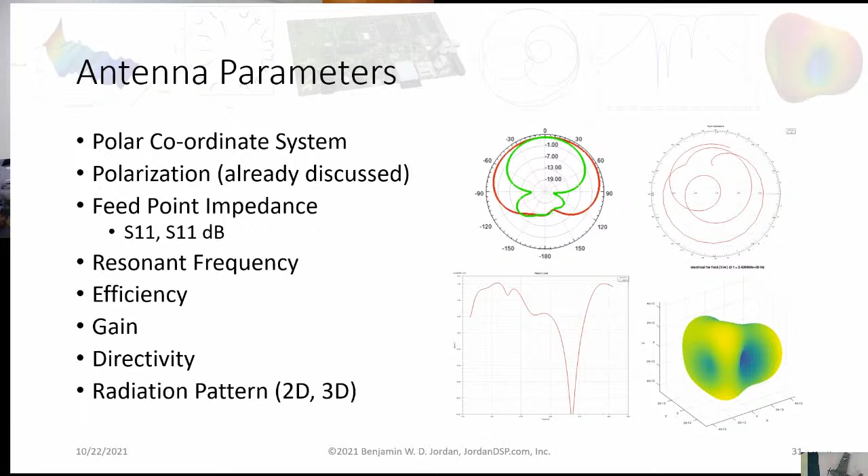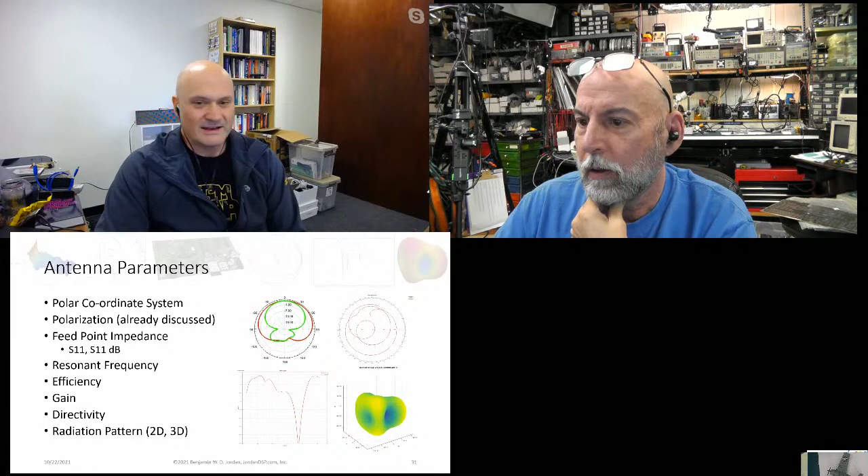OpenEMS is an open source finite difference time domain field solver. And so what does that mean? It uses the FDTD technique, which was invented by a brilliant postgraduate engineer called Yee. I think the technique was first published in the late 60s or early 70s, when it had to be done on mainframes. But now you can just do it anywhere, and it's probably the most common numerical modeling technique for electromagnetics. There it is. And you've got a picture there of the Yee cell.

The Yee cell is kind of the crux of it. It's what makes it an efficient, computationally easy thing: you divide the entire three-dimensional, or you could do it in two dimensions, model into these voxels. A voxel is a three-dimensional pixel. A voxel is a cube.

Right. And in the center of each surface in the Yee cell, say the three planes of the voxel, is your H field, and offset from those, in three of the corners of the voxel, are your E field locations, and that works naturally because the E field and H field are always perpendicular to each other. So I'm not doing it justice, and that's a very hand-wavy way of putting it, but there's other videos on YouTube that describe FDTD really well.

But OpenEMS is an FDTD solver written by, I think it's really just one guy, Thorsten Liebig. I hope I said that right. He's German, from one of the universities in Germany. And it runs under MATLAB as a plugin, or GNU Octave if you don't have a MATLAB license. It is multi-threaded, so it will simulate pretty quickly.

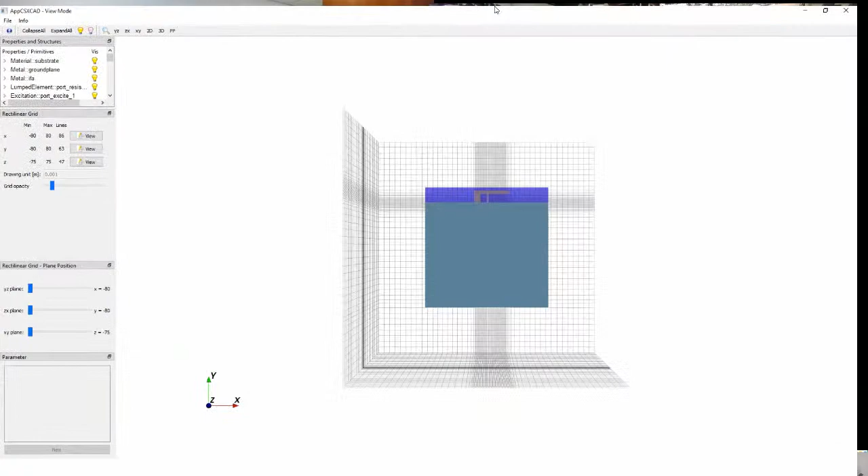So that's kind of what it looks like, and I can execute that from the text editor in Octave, and you can see it runs this additional executable. It's our 3D visualizer. So I have a bit of printed circuit board, and I have a plane layer, and then I have copper for the antenna radiating element, which is this part here, it's a half slot.

This is the feed line, and the feed point's here with the feed port at 50 ohms driving a sine wave. And this is the matching inductance. With an F antenna like this, which is half a slot, you adjust the feed point up and down to get an impedance match. And you adjust the length of the radiating element to get frequency tuning. So the longer the radiating element is, the lower the frequency.

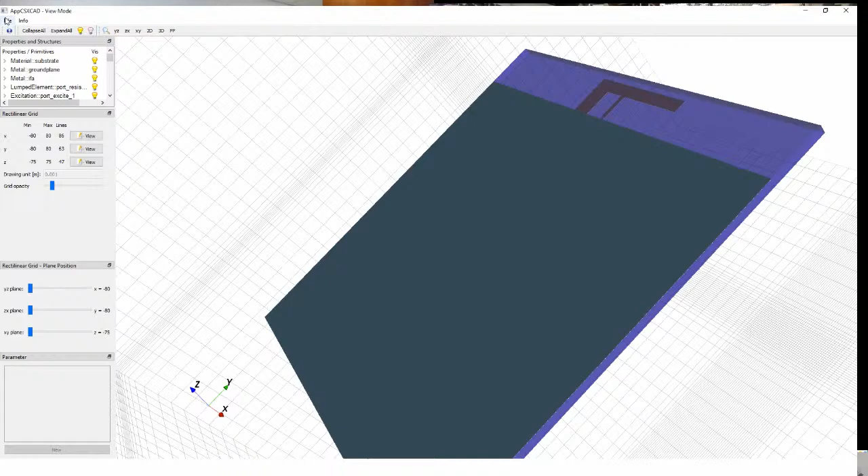This length here is a quarter wavelength. And then we adjust this inductance to ground on this side of the feed line to get our 50 ohm match. So that's done. I exit out of that, and it keeps executing. If I look at the command window, now it's actually launching the FDTD, and it starts to converge on a solution.

And in my outputs folder here, it's generating H5s, which are a sort of industry standard electromagnetic field output format. It just has the numbers in it. And this is running multiple threads. I don't know if it says how many threads. Let's see. It doesn't say. It says it's using SSE and multi-threading.

This one doesn't take too long. If I open up my task manager, let's have a look. Here's task manager.

You see, I sort by CPU, see Octave is the parent process, and it's running OpenEMS as a child. Let's see. It could be using more compute. Oh, I think it's already finished. It's already just finished. So it's actually already done that, and now this is our S11.

So the tuned frequency of the simulation is 2.4 gigahertz, and this is my impedance, real and imaginary impedance. And you see the resonant peak at the tuned frequency, or a bit below actually. And this is the field plot, which, why can't I swizzle that around? There.

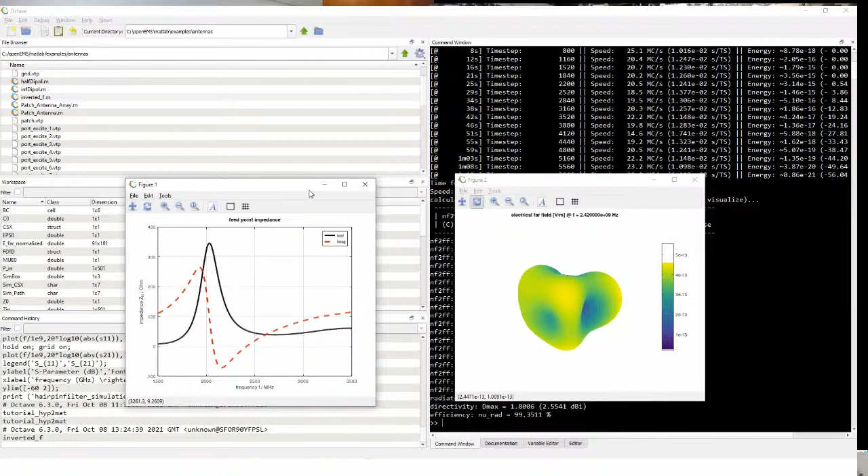And I think it would be good to have a project to basically parameterize a bunch of really common antenna types and just plug in the numbers. Like, oh, I want a meandering inverted F antenna that's tuned to 2.45 gigahertz. And I specify that frequency with a 50 ohm feed line, and then it calculates from that the dimensions as a starting point and then runs the simulation.

Right, right. So I'll close all of those. That's finished. So you see it didn't take too long, but it dumped all these outputs into this folder, including a VTK. So one of the things that OpenEMS does is it gives you an output for this visualization toolkit, which is also an open source kind of standard scientific visualization tool set. I thought I'd opened ParaView. ParaView is a program that uses VTK.

Let me, and it's hard to use. I'm still learning. Yeah, let me run that. This is ParaView. ParaView is really powerful and very flexible, and so as a result, it's very confusing and hard to use. Because it's not just for viewing electromagnetic fields, it's for visualization of any kind of scientific data.

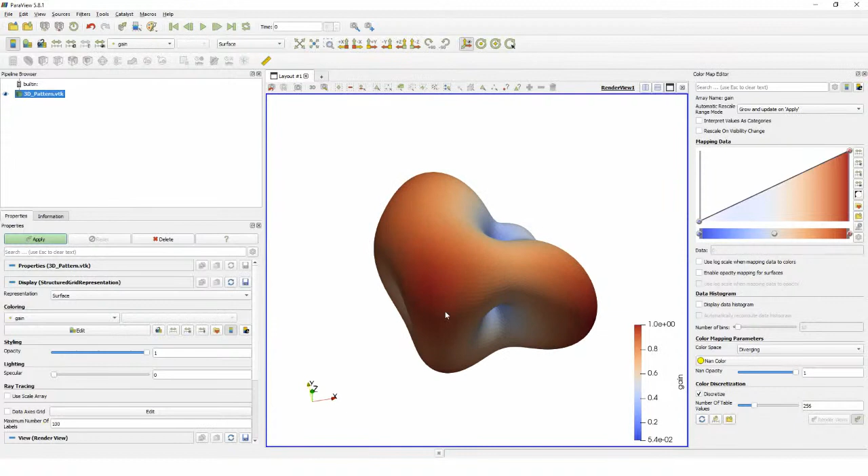But let's open that VTK. Let's see. What I want, OpenEMS. Here it is, the VTK. And then by default, I don't know why it does this. You open something and it's not visible. So you have to click on the eyeball. And there's the default view of the 3D antenna response pattern in ParaView. So it's easy just to get that working.

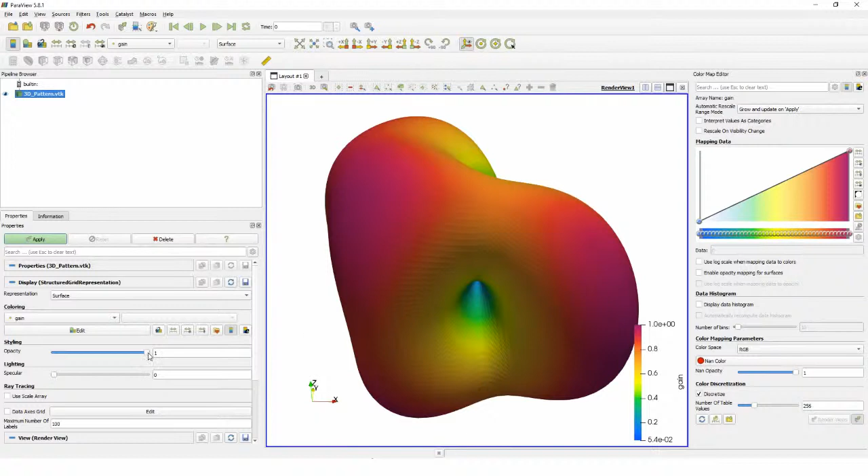It took me ages to figure out, but what I actually wanted was a different color scheme, like rainbow. Right, right. Oh, cool. And then I wanted to superimpose that with the 3D design, and I found that to be very difficult. Right.

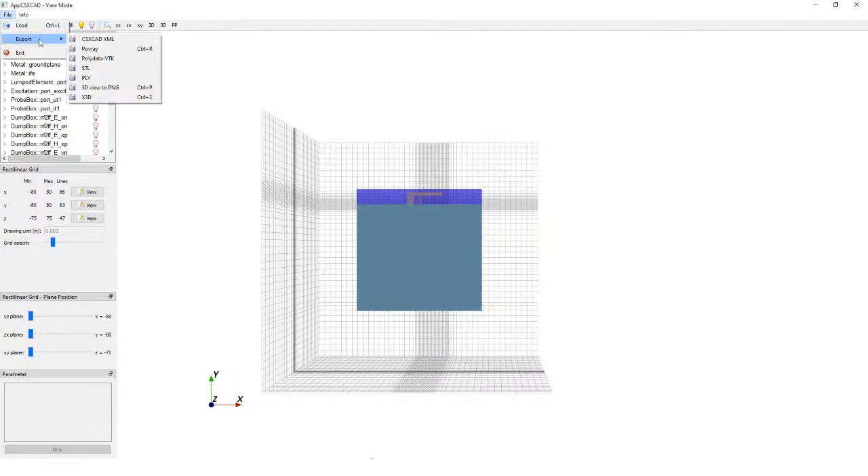But if I go back to this and if I run that again, oops, where's my editor? If I run this again and I just want to run the 3D plot tool, right? Right, right. I just selected the wrong thing there, but whatever. This is my 3D model. This tool also has an option to export to VTK, which can be opened in ParaView.

So I export the VTK, I'll put it in the same folder. I think that's done, and I close that. I'm still running that, so I want to quit running this. Let's go back to here, and now I can open the, let's see, which one is it? IFA VTP, and ground plane, and substrate.

So open all of those. Now let's turn that off and turn these on. There's my IFA antenna, ground plane, and substrate. And they're all different colors, so I'm going to have to change the substrate color. Let's see. Make the substrate, I don't know, PCB-ish. Yeah.

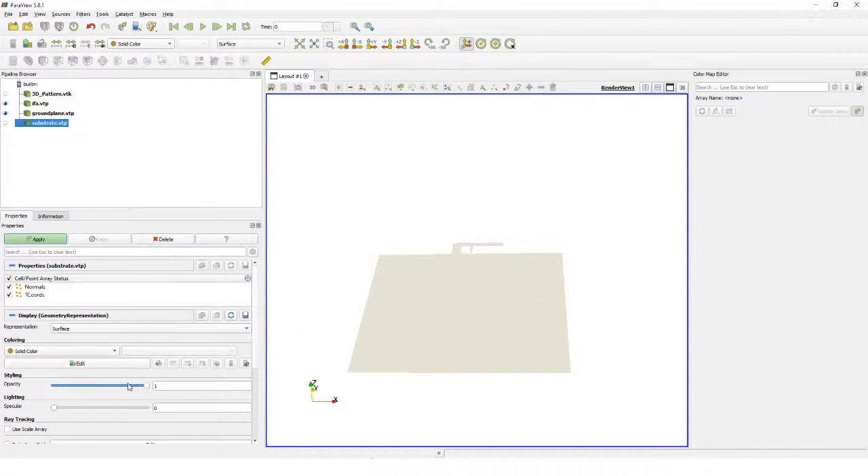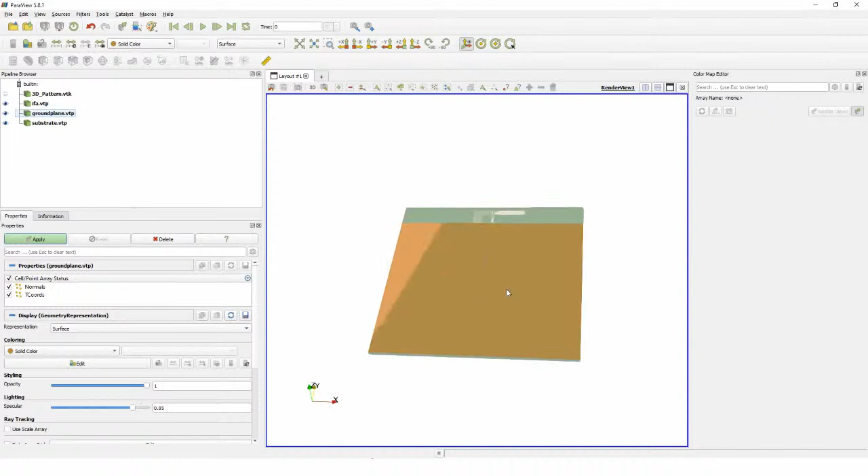And then make it, right. So ground plane, let's make that coppery and shiny. So that's our IFA, right? Now let's turn the 3D pattern back on and zoom out. The pattern scaling is kind of funky, but at least it gives you an idea of the direction.

You're right. These are all set to the same XYZ coordinates. So counterintuitively, and intuitively as well, you get no transmission directly out the back of the ground plane. Well, you'd expect that, or out the side of it.

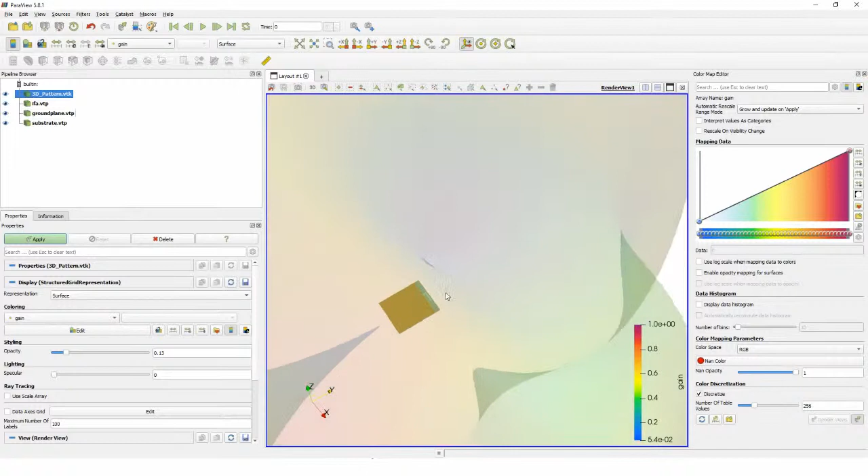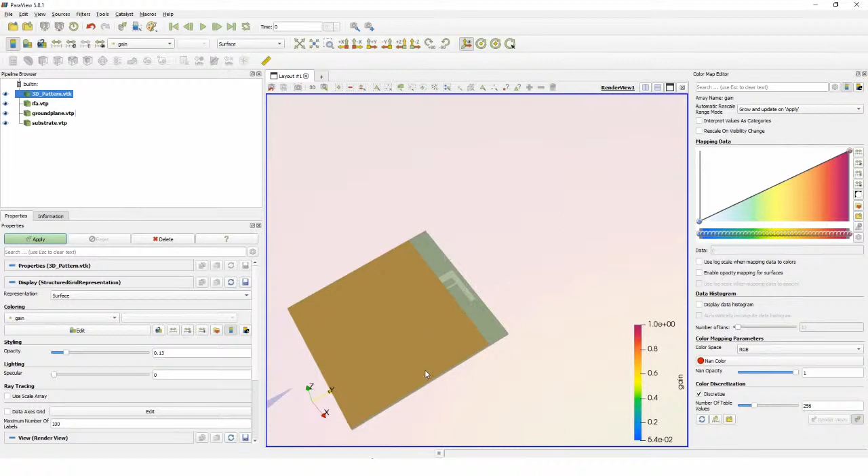Counterintuitively, you'd expect, this is the radiating element, you'd expect lots of radiation out in this XY direction. But actually, that's where you get hardly anything. And the reason is that's a quarter wavelength open circuit stub, right? So the voltage at the tip is going up and down at a maximum peak, but the radiation from it's half of a slot antenna, and the radiation comes out most up and down in the Z plane all around.

But that just gives you some idea of how to use VTK with openEMS to figure out, you know, this is the antenna radiation pattern, and it is scaled. It's actually scaled to gain. Oh, okay. So you can simulate it and get this data, and normally you just use the plotting features in MATLAB or Octave to plot it in a normal way. And there's also an RF toolbox from MATLAB and a clone of the RF toolbox for Octave that'll do Smith charts and all of that as well.

And so you can take this data and produce antenna documentation so that you actually have something real you can compare with once you put it on a VNA. Right. That's really cool, dude. It's a lot of work and it's a lot of writing, but that's really cool.

Yeah. And I'm planning on getting more into this as I write more and develop more of my class going into the future. I don't want to boast in the future yet when I don't know what's coming my way, but I have some intentions to develop a lot more material around this because it's just lately become far more interesting to me, and I feel like there's a lot of people who want to know this stuff and don't know where to start.